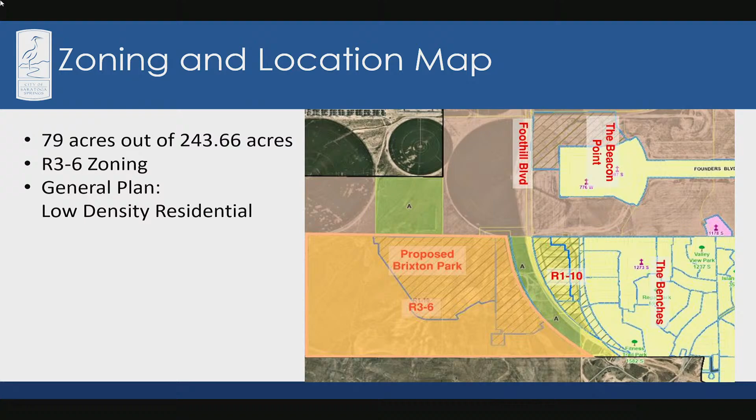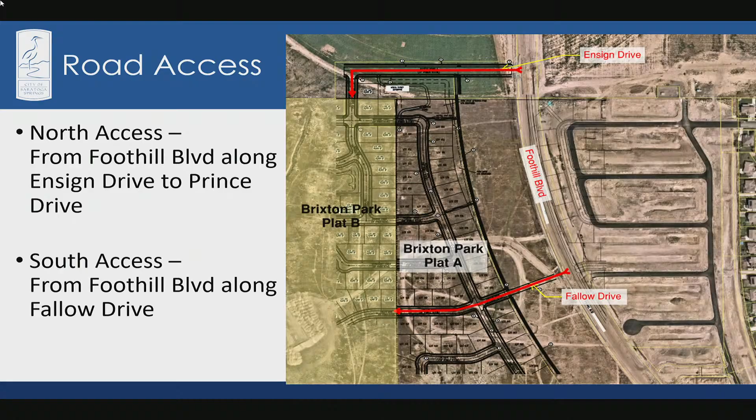It is 79 acres. I wanted to show you the road access — it is in your staff report. They are gaining access from Foothill Boulevard across to Ensign Drive and down Prince, and then from Fallow Drive into the subdivision. The Fallow Drive connection to the west side of the Mountain View corridor is temporary. When Foothill Boulevard goes down to Grandview and the Mountain View corridor comes in, Grandview is going to be an interchange. So once the corridor goes through, that will be removed, and further south there will be connections to Grandview.

This subdivision is 248 lots. The average size of the lot is 7,142 square feet. They have 11.89 acres of open space, at 3 units per acre. They have 2 parks — one that is 2.269 acres, and the second one is 2.485 acres. And then they have the trail in the power line easement.

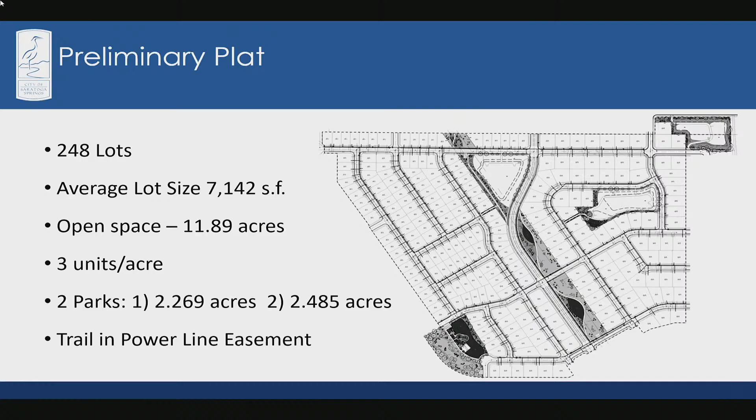I put all of these up here on the presentation to give not only you, but the public, a view of what is being installed. You can see there is the power line corridor that is going to encompass the trail — that is a regional trail on our master plan as well. And then the open space to the east of the power line trail easement is a detention basin.

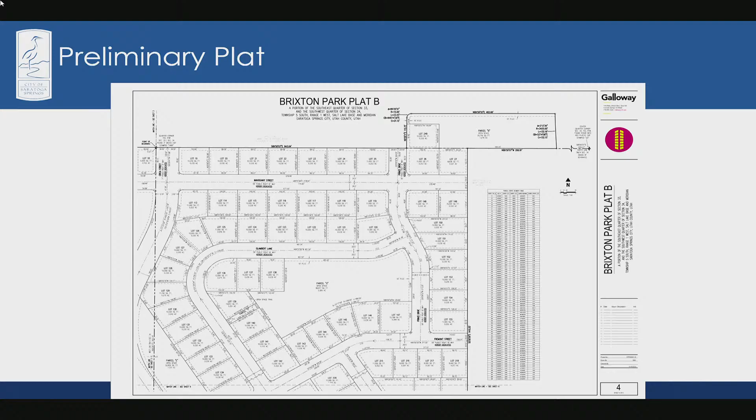Both of these parcels are open space. You have the one up at the top, which is a detention basin. This detention basin, they've created it big enough, and Dan could probably answer to this. Just below this, on the east side of the boundary and below the detention basin, that parcel at the top is the Brixton A detention basin that was approved. So those two parcels are going to have an entire detention basin to help with stormwater for Brixton B and Brixton A. And then the middle one is also a detention basin with a park.

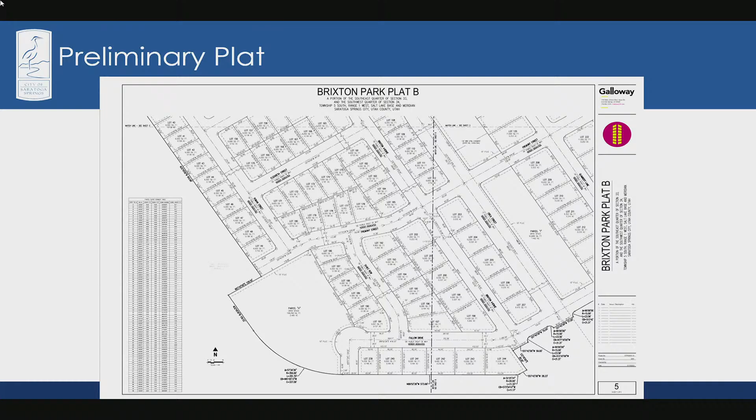The property on the east side, open space parcels, are the power line corridor and trail, and then the park is down here in the southwest. In future phases they're going to actually add to this park, so it will be bigger.

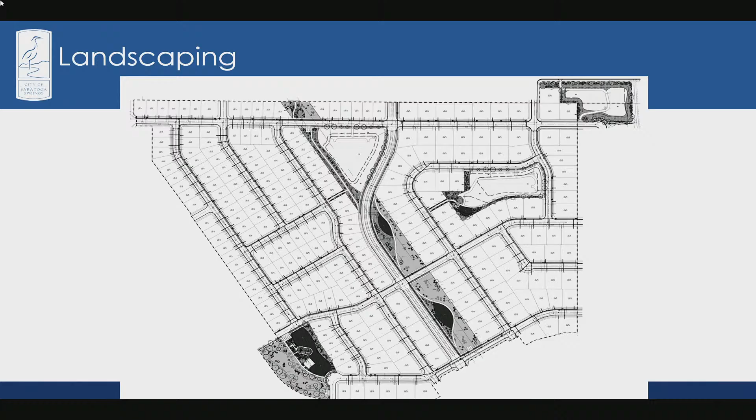Just showing you the layout of the subdivision. Here's the landscaping - they do have quite a bit of landscaping. They do meet our amenities, and I put this in here just to give you an idea. I don't know how often we actually put these in staff reports, you've seen them a few times, but it's something we need to get in the habit of showing you.

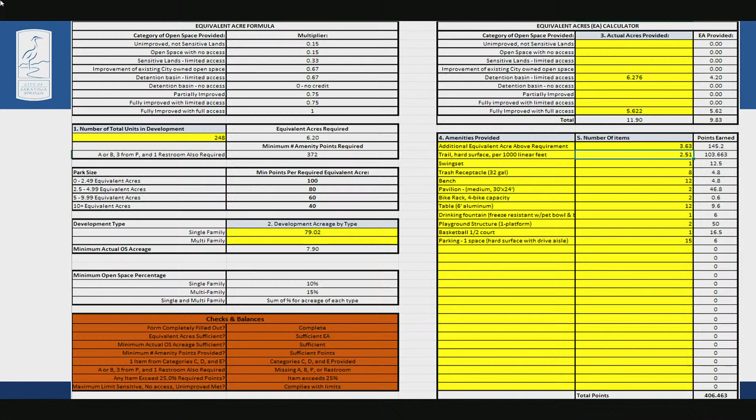So on the checks and balances, you'll see missing A, B, P, or restrooms. That's actually been met with their parking stalls for parking at all of the parks. They actually exceed that - so they have, I can't see it, 406 amenity points when they're only required to have 372. So they exceed the amenity points. I just wanted to give you a look at that because you don't always see it.

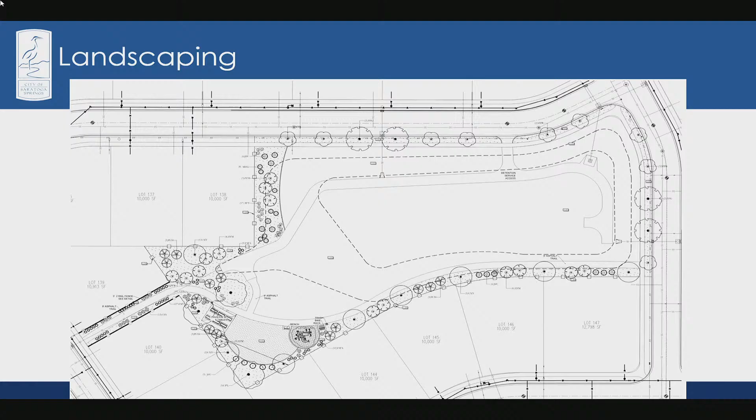Again, just showing the landscaping with the trails and some of these amenities. Again, you'll see the different accesses for trails, the combination of the detention basin, so that's a limited access, but we did ask them to do a connection because of the road they had to put in for the detention basin - we all know little kids are going to be riding their bikes in there, so we asked them to put a connection to the trail. To the south it's too steep, so at least we have one of those connections. And again, just the trail within the power line corridor.

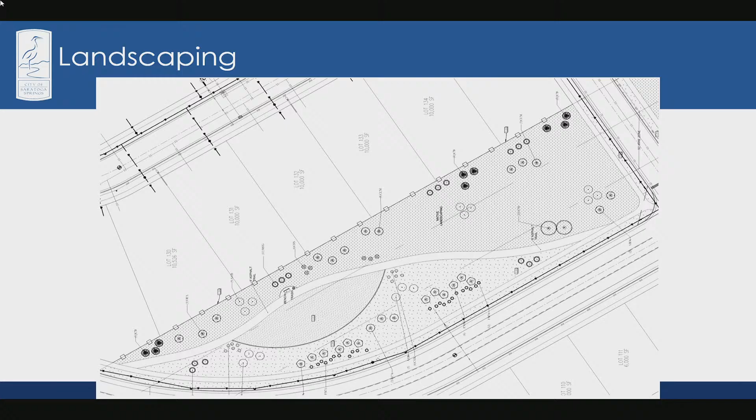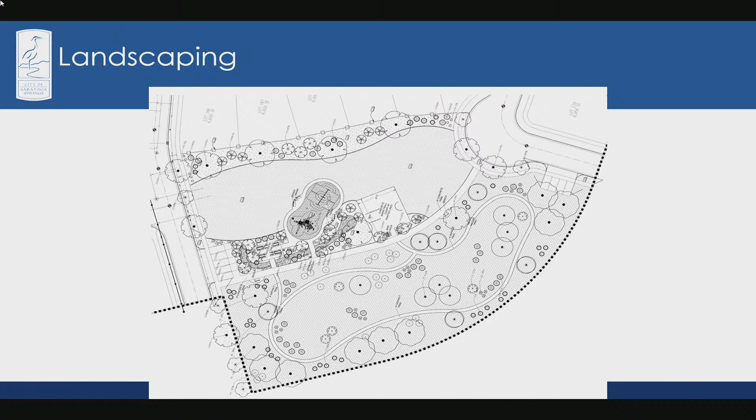And this here is the park. So there will be quite a bit of their amenities come from here. So they have a basketball court, a playground, swing set, pavilion, trail benches along the trails and so forth, as well as their parking.

And this here shows - so the dotted line is the boundary of the Brixton B subdivision. And so you'll see the improvements in landscaping that is encompassed on the detention basin parcel. I don't remember what parcel number it is or letter. This is from Brixton A. So they combined those two to create the storm drain detention.

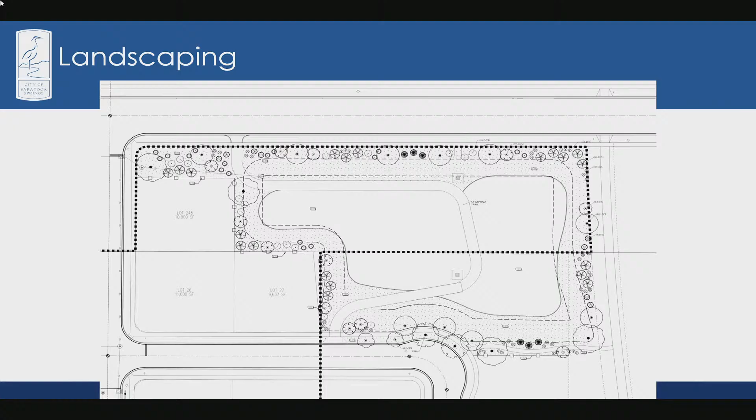And staff recommends approval for this based on our conditions and findings. Any questions? Thank you, Gina.

Is the applicant here with us today? Yes, we have a representative from Saratoga 262. It's Trey. You can go ahead and come on up and sit so you can answer their questions. Once you sit down, could you please state your name and address for the record? Yes, Trey Orsak. Address is 1074 Timber Drive, Lehi, Utah. Thank you. I will now turn this over to the Planning Commission for questions and comments.

Commissioner Kilgore: Thank you for complying with all the requirements. It's nice to see an application where just about everything is just compliant. It just makes it really easy for us, and a lot easier for us, and we really appreciate it because it is a lot of work. But you'll be surprised at how many of these applications come with so many non-compliances. I mean, a lot of times it's just timing. But anyway, thank you for that.

It also looks like it's very well planned out and thought out, the properties, and also thank you for providing more than the necessary amenities as well. I think, at least on behalf of residents, I think that's terrific.